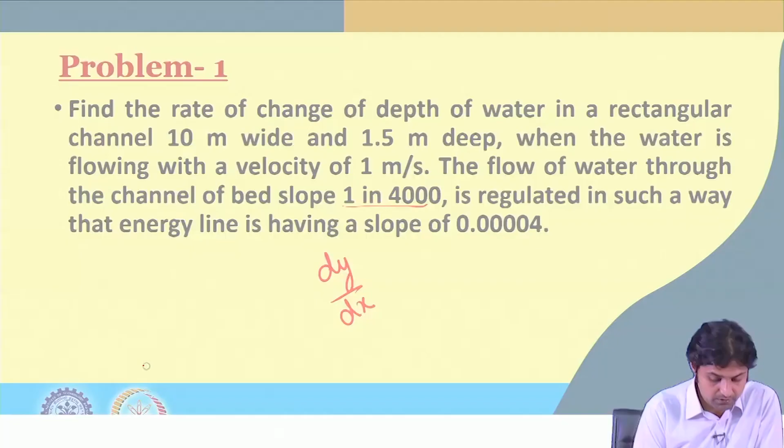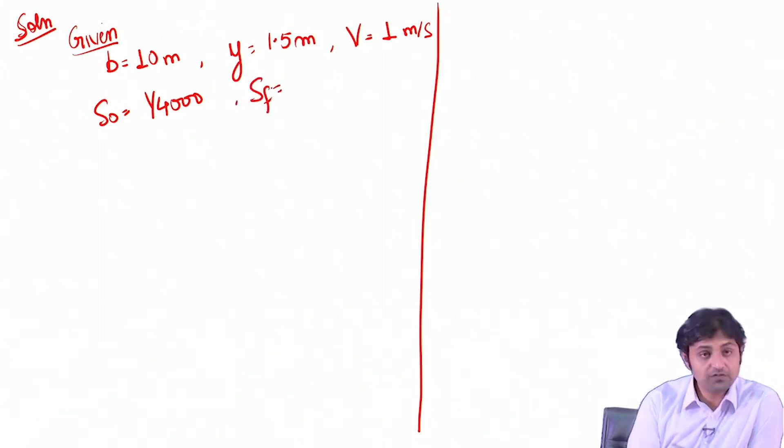We are going to see the solution. What things we have already been given: B is given as 10 meter, depth is given as 1.5 meter. We also have been given velocity of the flow, 1 meter per second. Bed slope also has been mentioned as 1 in 4000, so 1 by 4000 is the bed slope. We also have been given the slope SF, that is 0.00004.

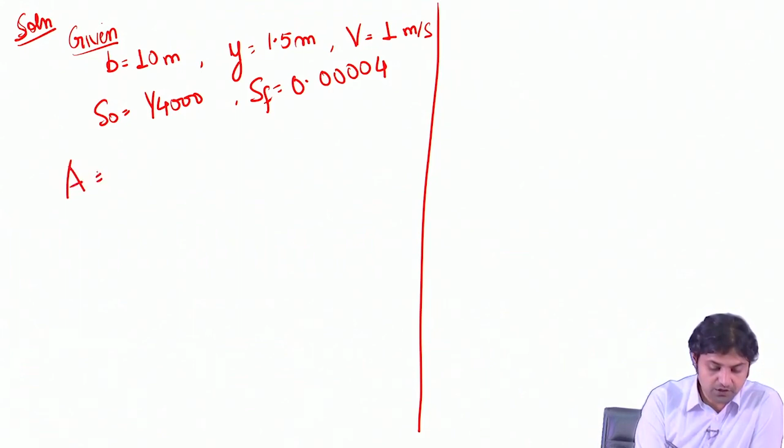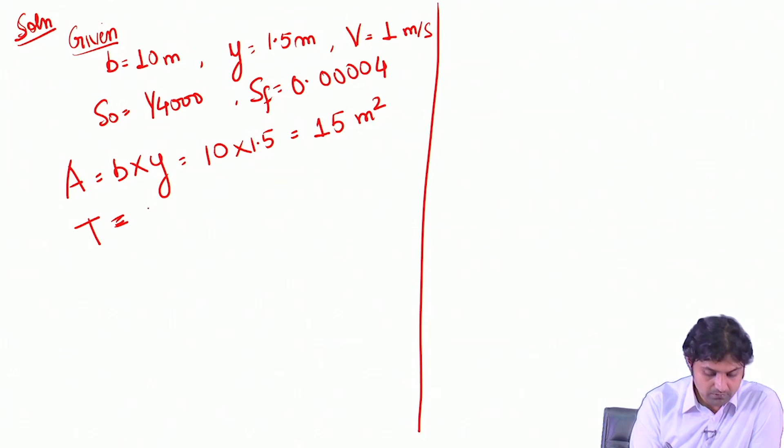This is quite a simple thing. First we need to calculate the area of the flow, which is nothing but B into Y, so 10 into 1.5, which is 15 meter square. We will go very systematically. T, the top width, is nothing but B, that is 10 meter.

Discharge is area into velocity. Area is 15 meter square into velocity 1 meter per second, so that is 15 meter cube per second. So we have been given Y, B, V, S naught and SF. We calculated A as 15 meter square, top width is already given as 10 meter, and Q we calculated as 15 meter cube per second.

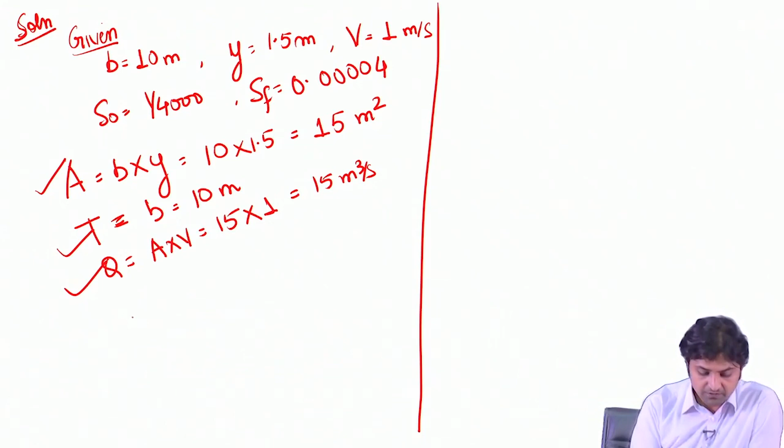What is the equation in gradually varied flow that we have derived? We derived that dy by dx equals S naught minus SF, divided by 1 minus Q square multiplied by T, divided by g into A cube. This is the equation that relates dy by dx, and we have been asked to calculate this.

So dy by dx equals S naught, which is 1 by 4000, minus SF which is 0.00004. Then 1 minus, Q is 15, so 15 square into T which is 10, divided by g which is 9.8, and then A cube, area is also 15, so 15 cube.

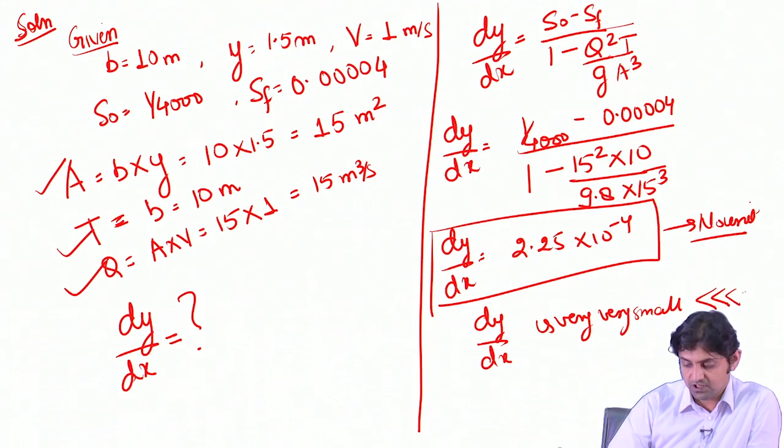If you calculate that, dy by dx will come out to be 2.25 into 10 to the power minus 4. Will this have any unit? No unit. So if you see, the slope dy by dx is very small, we can say much less than 1, true.

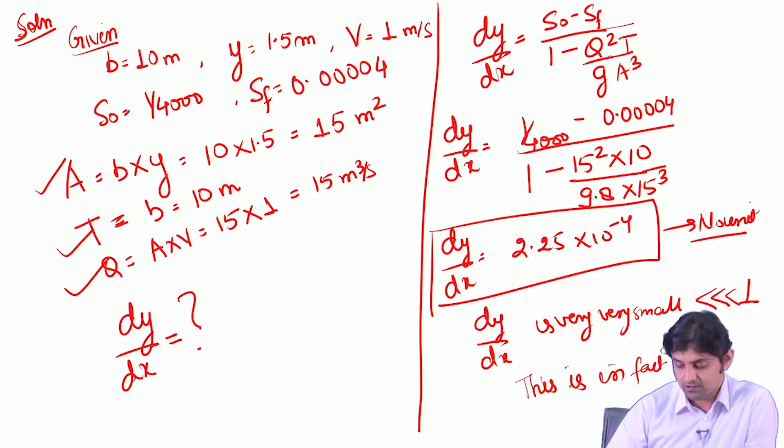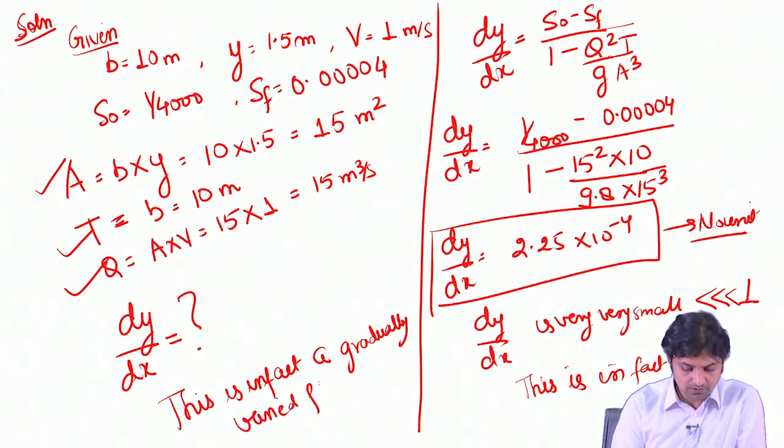So this is, in fact, I will write here, this is in fact a gradually varied flow.

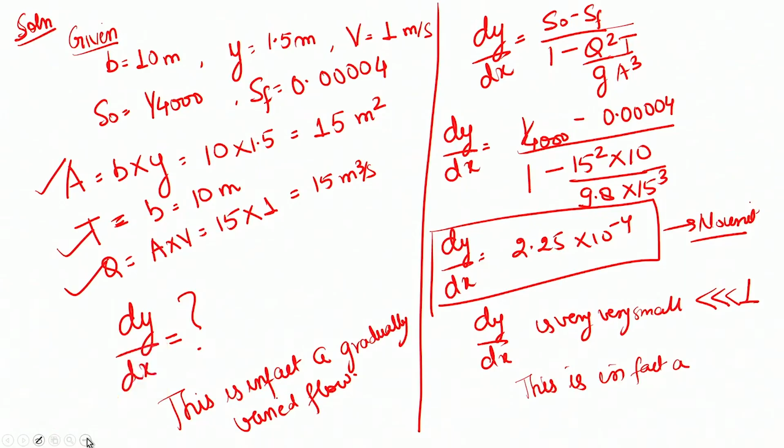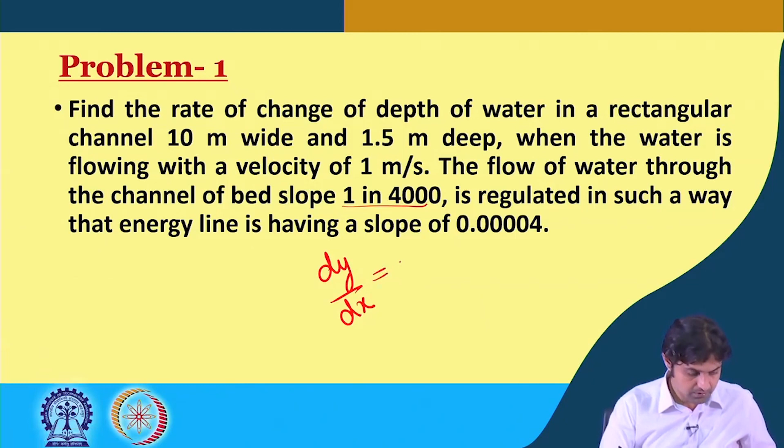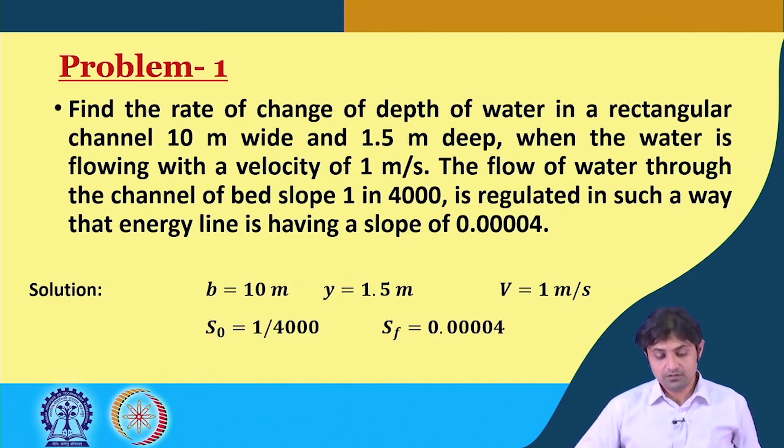So we go back, dy by dx came out to be 2.25 into 10 to the power minus 4. I will erase this, and I have included the solution here as well. These were the things that were given: area, same as we worked out on screen. The same formula, dy by dx equals S naught minus SF, and this is what we get. This was the final answer which we have seen on the white screen.

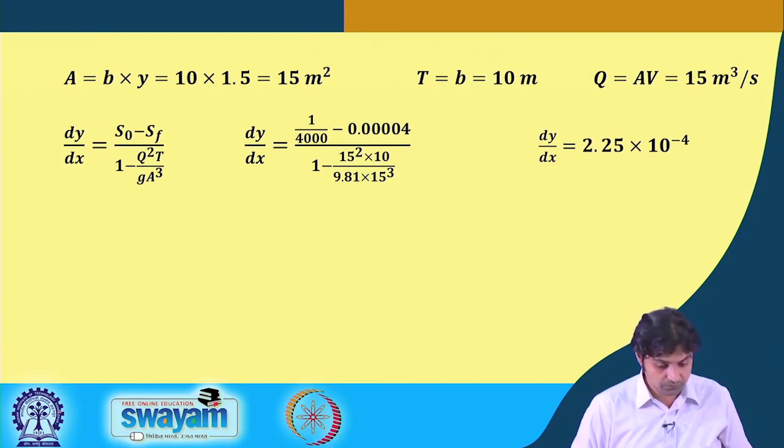Now we are going to look at another problem. The question is: a rectangular channel with a bottom width of 4 meter and a bottom slope of 0.0008 has a discharge of 1.5 meter cube per second. In a gradually varied flow in this channel, the depth at a certain location is found to be 0.30 meter. Assuming Manning's n is equal to 0.016, determine the type of gradually varied profile.

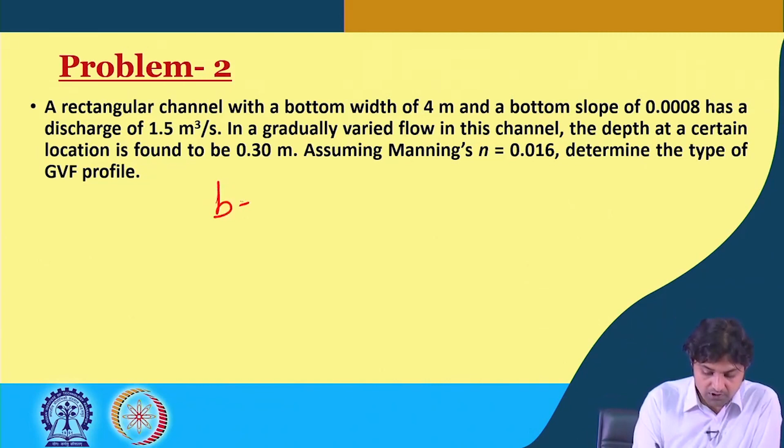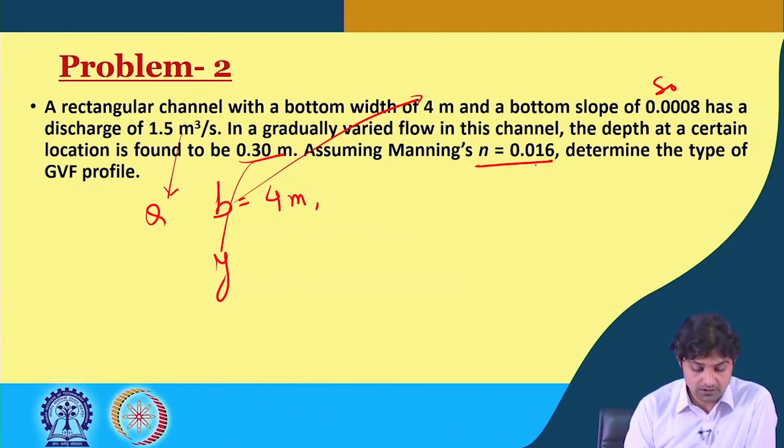We have been given the bottom width 4 meter, right here. Slope S naught is given, Q has also been given, and we have been given Y as well. Manning's n is given. So what type of gradually varied profile will it be? We are going to see that, and it will be very good practice for you to apply what you have learned about mild slope, steep slope, adverse slope, critical slope and the horizontal bed. So I will go to the white screen.

To start, SOLN means solution. So what are the things given to us? I'll draw. Given is B is equal to 4 meter.

Y we have been given as 0.30 meter. Okay, this Y is given. Q has been given as 1.5 meter cube per second. S naught is also given as 0.0008, and Manning's roughness is also given as 0.016.

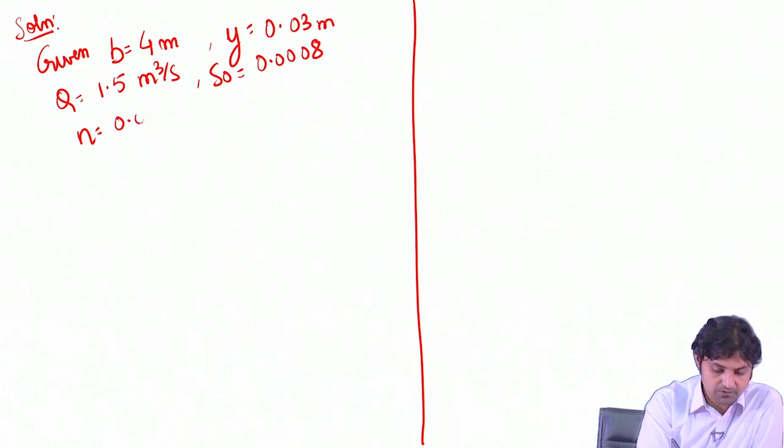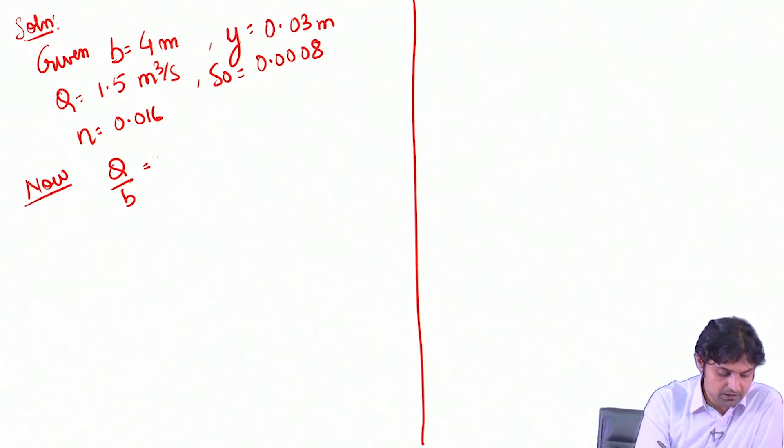All right, so now capital Q by B is 1.5 divided by 4, which is 0.375 meter cube per second per meter.

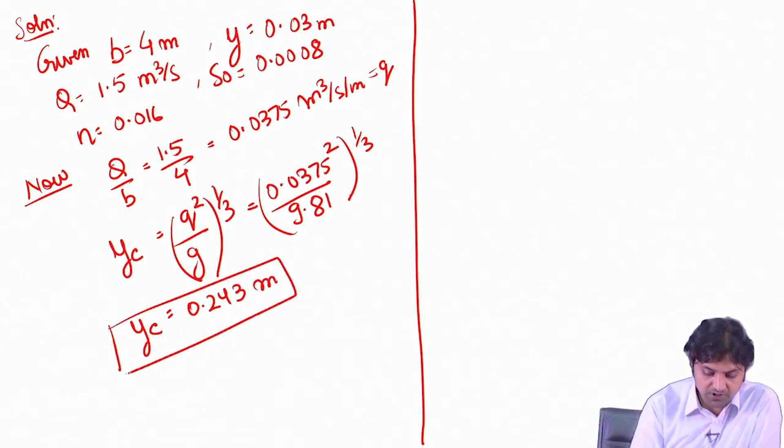So this is small q, all right. Now, you remember the way we calculated the critical depth, YC was q square by g, to the power 1 by 3, if you remember the formula from our lectures last week. So this is going to be 0.375 whole square by g, which is 9.81, whole to the power 1 by 3. If you do this calculation using your calculator or by hand, this comes out to 0.243 meter. So the critical depth which we have got is 0.243 meters.

All right, what is the other thing that we need to find? So we can use Manning's equation: Q equals 1 by n, A into R to the power 2 by 3, into S naught to the power half.

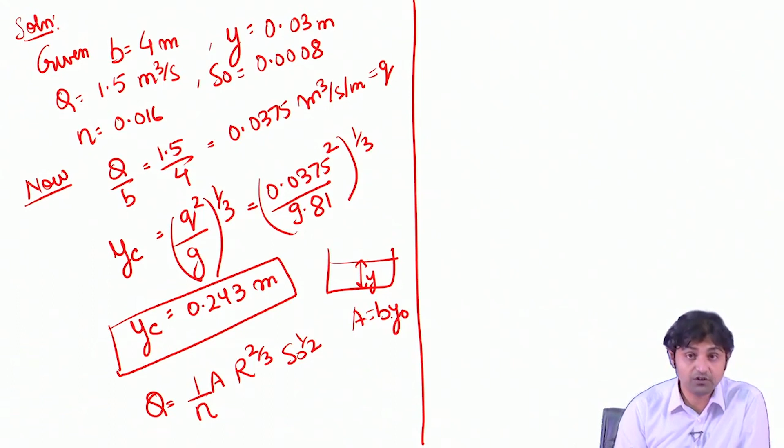So the area we already know, all right. Since this is a rectangular channel, if this is y and this is b, the area is b times y naught, because we also need to calculate the normal depth. So area is b y naught. Using this, hydraulic radius will be A by P. Here it is actually 4 y naught, so hydraulic radius will be 4 y naught divided by 4 plus 2 y naught.

Okay, so if we use all these values in this equation: Q is 1.5, given equal to 1 by 0.016 is n, A is 4 into y naught, hydraulic radius is 4 y naught divided by 4 plus 2 y naught, this whole to the power 2 by 3, and then multiplied by S naught to the power half, where S naught is given as 0.0008 to the power half.

All right, so this will actually give us: y naught to the power 2 by 3 divided by 4 plus 2, y naught to the power 2 by 3, is equal to 0.0842.

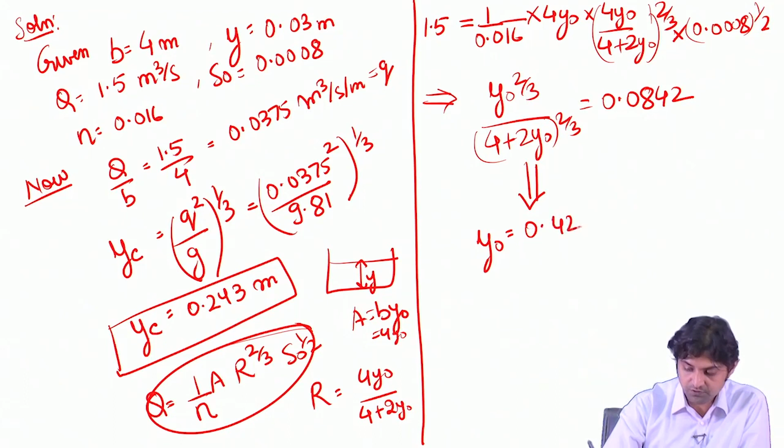So if we solve this, you can use any method, and we will obtain y naught as 0.426 meter. So the normal depth we have calculated using Manning's equation.

Is that true? Because that was the thing that we started with. So YC came out as 0.243 and the normal depth came out to be 0.426. Now, if you recall, we were talking about how if there is a horizontal bed, there is not going to be any normal depth, and here's why we were saying that. We were saying that because if S naught is equal to 0, then there is no existence of Q as such according to this equation. Also, when the slope was adverse, so S naught is less than 0, then S naught to the power half is an imaginary number.

So, concentrating: YC is 0.243 and Y naught is 0.426. First thing, since normal depth is greater than YC, this is going to be an M slope channel. Now, the water depth is actually—yes, so actually water depth is not 0.03 which I wrote, it was 0.3 meter here, all right.

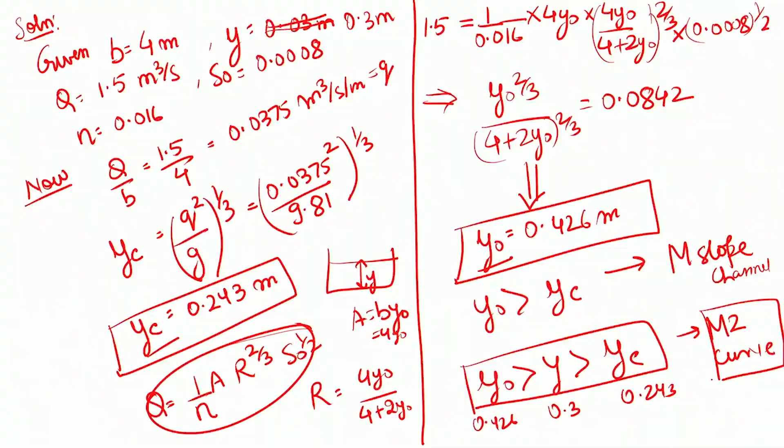So we see this: Y naught is greater than Y, and this is the critical depth. This was 0.426, this was 0.3, and this was YC was 0.243. So which type of curve? This is an M slope, plus since Y lies between Y naught and YC, it is going to be an M2 curve. So this is a good example, a very simple and good example indicating how you have to find the type of the GVF profile, all right. So this came out to be an M2 curve.

I will just erase this. So this is actually 0.3 meter, because the depth is 0.3 meter. So this is a typing error, okay. All right.

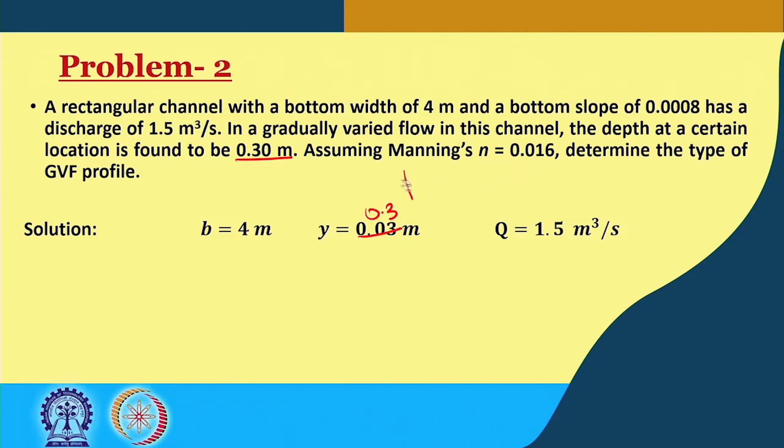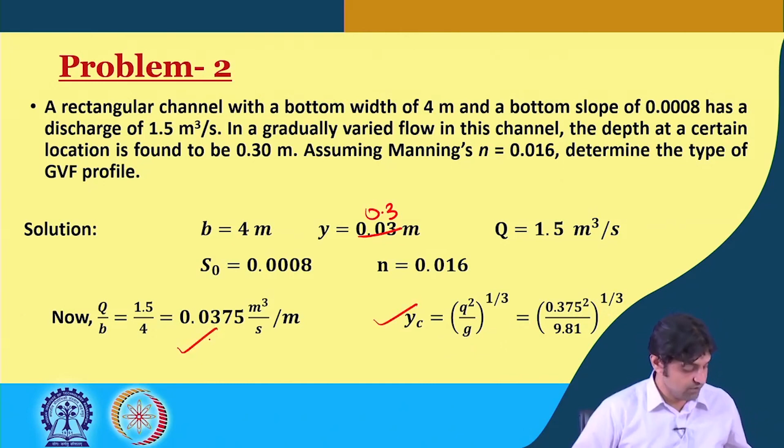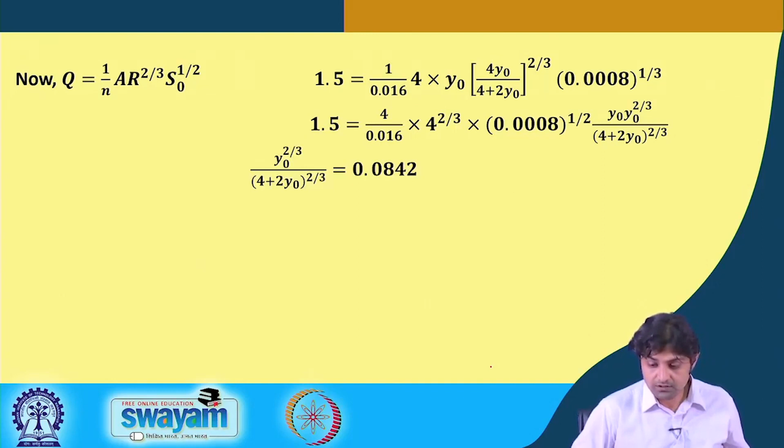All right, so similarly we have this again, a typed solution available. I think I will just correct this one when I provide you with the course material. So these are the things that were given. Similarly, we have calculated small q, and the critical depth is calculated like this; it came out to be 0.243 meter. So now, using the Manning's equation, we estimated the normal depth y naught, and this y naught came out to be 0.426, all right.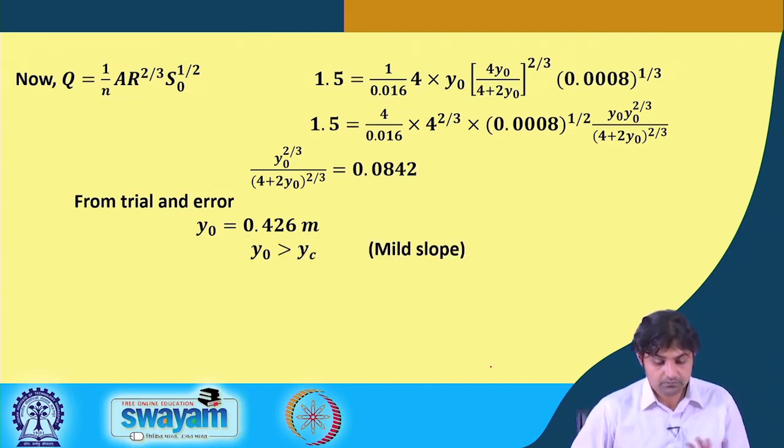Since Y naught is greater than Yc, it is a mild slope, and Y is less than Y naught, so it is called an M2 curve.

So we have another question. A wide rectangular channel has a Manning's coefficient of 0.018 for a discharge intensity of 1.5 meters cubed per second per meter. Identify the possible types of gradually varied flow profiles produced in the following break in the grade of the channel. S01 is 0.0004 and S02 is going to be 0.016.

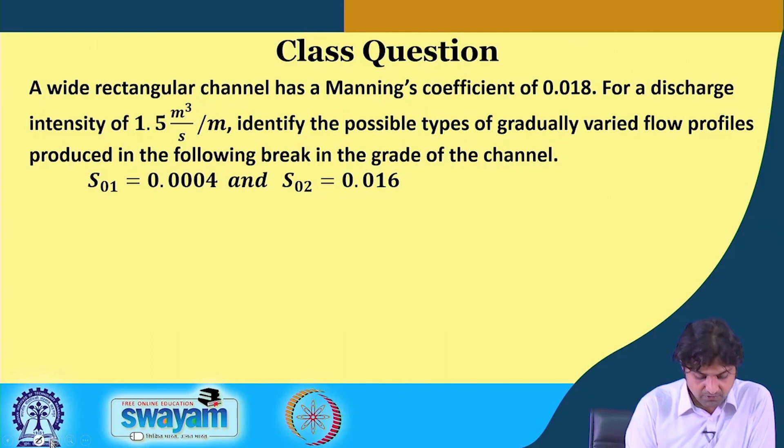Okay, this actually is a good question. Because in this topic we have less number of questions, I think it is better to solve it here on the white screen.

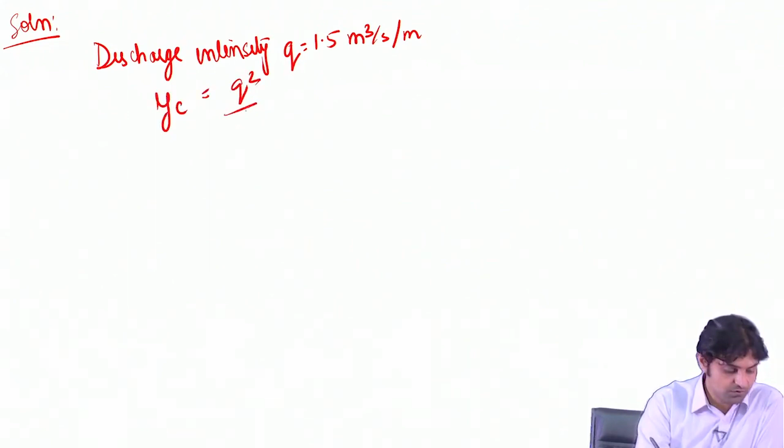So the solution shall go like this. Discharge intensity, small q, is equal to 1.5 meter cube per second per meter. So Yc will be found by small q squared by g to the power 1 by 3, a very simple formula that must be remembered, 9.8 to the power 1 by 3, and that is going to be 0.621 meter. So for normal depth, what do we use?

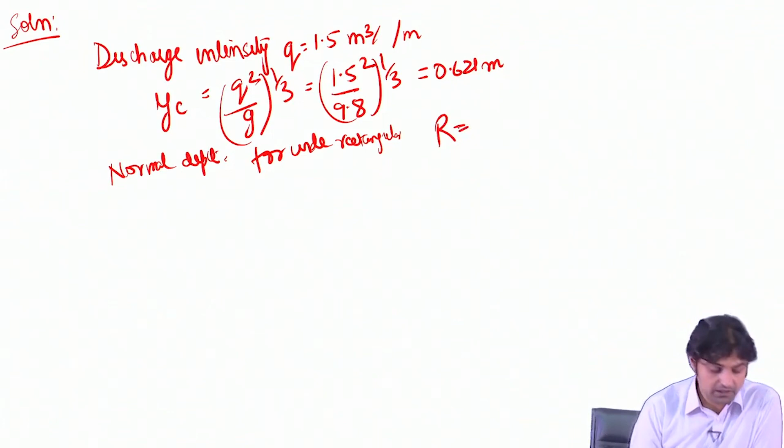Manning's equation. So for a wide rectangular channel, since it is so wide, the hydraulic radius becomes y naught itself for a wide rectangular channel.

You must have a question why. So hydraulic radius is A by P. B times y naught is A, P is B plus 2 y naught. If it is wide, B is very much greater than y. So B plus 2 y naught will be approximately equal to B. So this B and B get cancelled, that is why for normal depth in a wide rectangular channel, the hydraulic radius is the normal depth itself.

So now we use this formula, q is equal to 1 by n times y naught into y naught to the power 2 by 3 into s naught to the power half. You can also use the formula with capital Q, but I find it much better using small q. So we can write y naught as n into q divided by under root s naught, to the power 3 by 5.

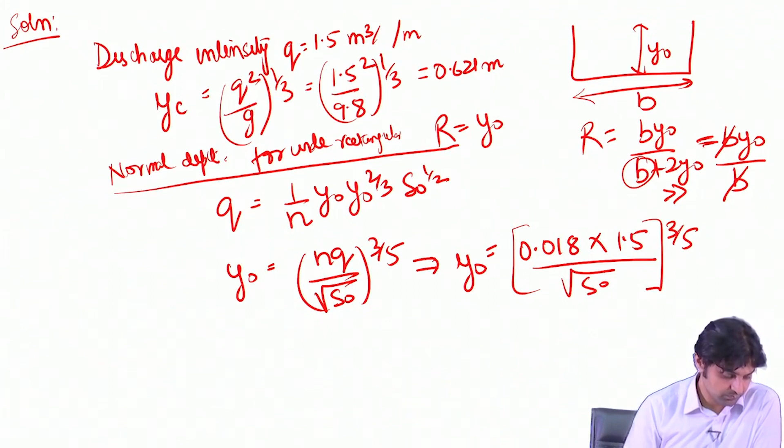So this implies y naught is going to be, substituting the values, n is 0.018, small q was given as 1.5, and under root s naught. So the question is, actually we can draw a table here.

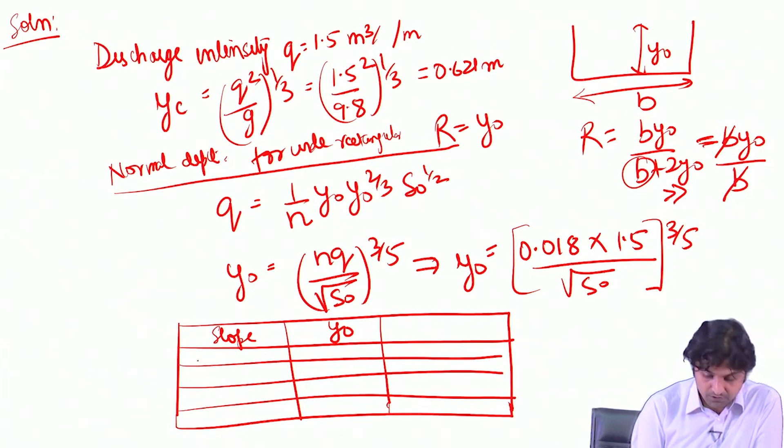That says slope and y naught. So 1, 2, 3 and 4. There are slopes 0.0004, 0.016, and then there is a critical slope, because this is the critical one. So for this S naught, if we put in the normal depth, we get 1.197, and if you put S naught as 0.016, we get 0.396, and Yc is 0.612.

There are two normal depths, y01 and y02, here. One gives us 1.197, the other is going to be 0.396. So this is what is written.

So if you go from 1 to 2, since y naught here in this one is greater than Yc, this is mild slope, first one. But in the second case, the y naught is less than Yc, so basically this is the steep slope. So the resulting curve is M2 on mild slope and S2 on steep slope, because the water depth is also here.

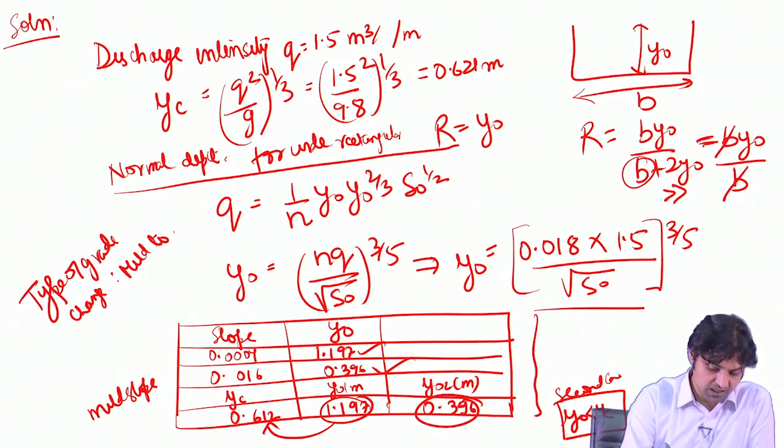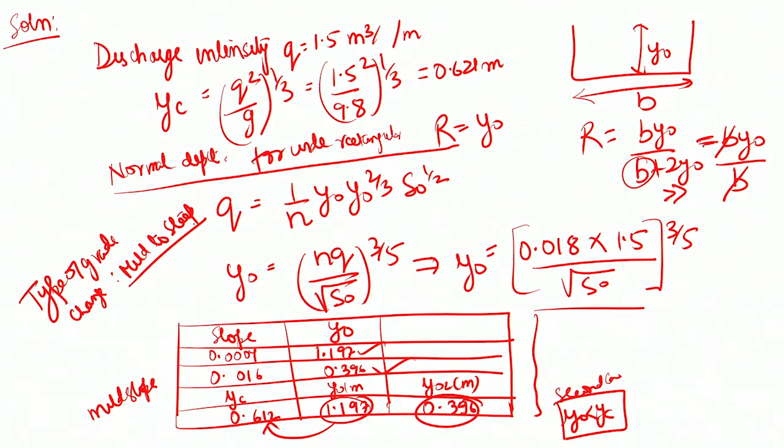So the type of grade change is mild to steep. So basically until this, this is fine, okay, good.

So we have included the solution again here for your convenience.

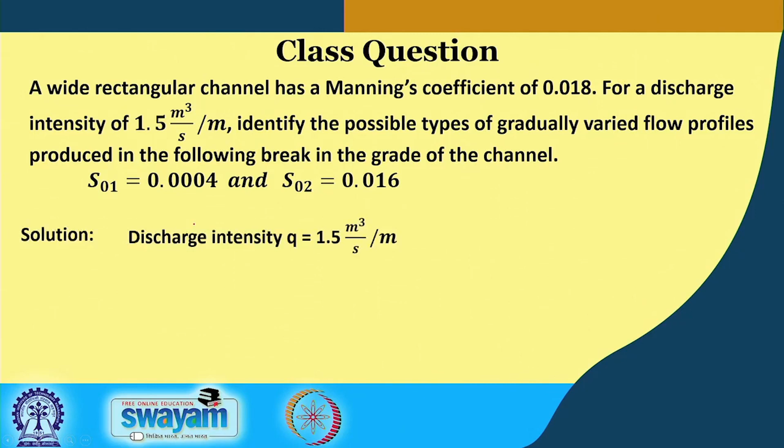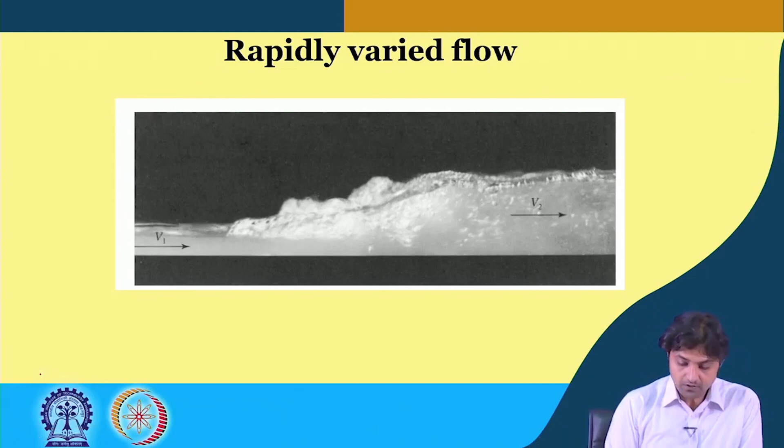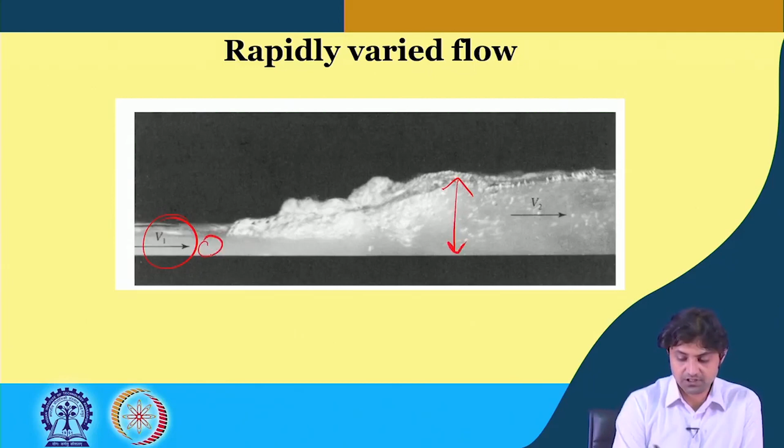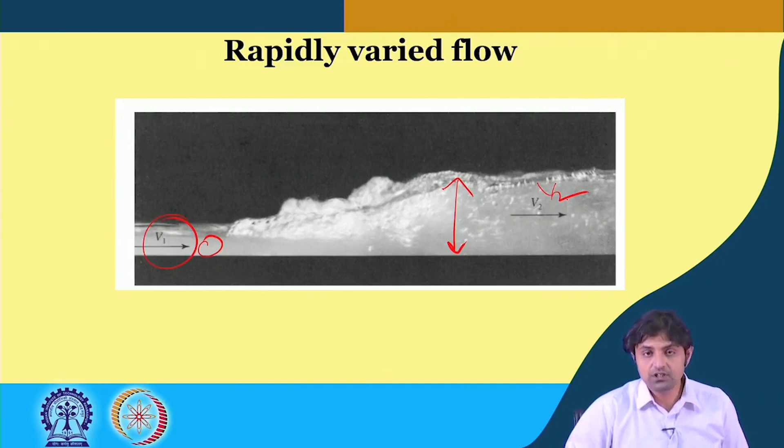See, if you see, there is something that is coming with a velocity v1 here, and somehow this height is larger, right. I mean, this seems that there is something which is different from this area. So the velocity becomes v2, maybe the height has increased or there is a bump or something. So in that case the flow varies very rapidly. Suddenly if there is some rapid change in the water level elevation, it is called rapidly varied flow. In this particular case, there is a hydraulic jump due to the change in bottom elevation.

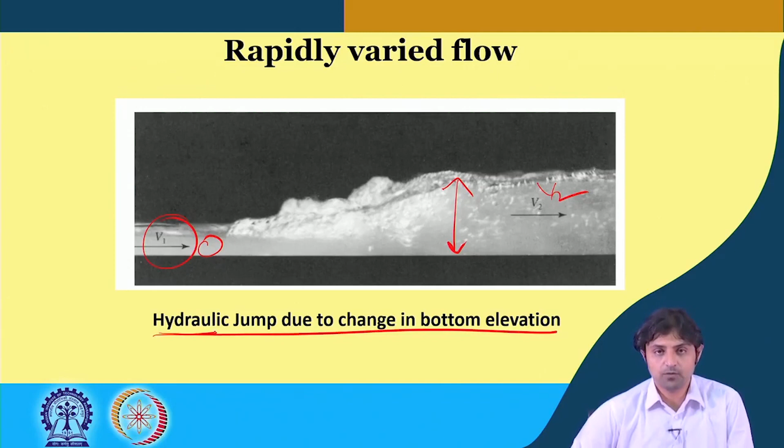We are able to say that because we know it from before. This is the photograph, probably from one of the experiments. So that was a fair introduction to rapidly varied flow. You now understand what hydraulic jump is, one type of rapidly varied flow.

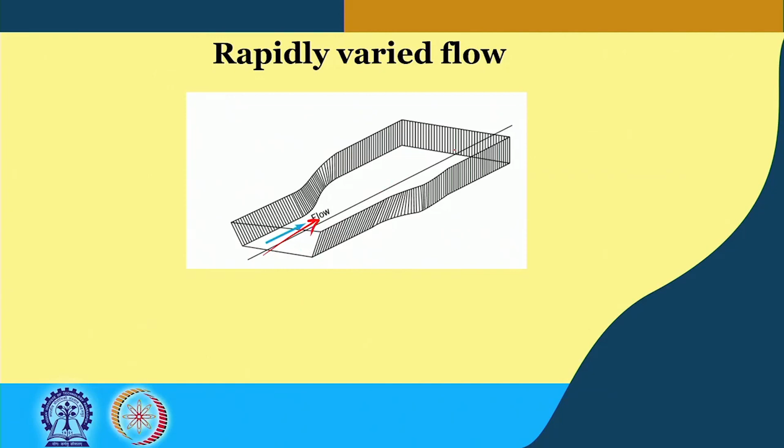So if you see a flow like this, if there is a flow coming in this direction and the area suddenly increases, that is the rapidly varied flow that happens due to the transition. So the first was due to the height, the second one is due to this transition, changing the area, transitioning from smaller area to larger area, for example.

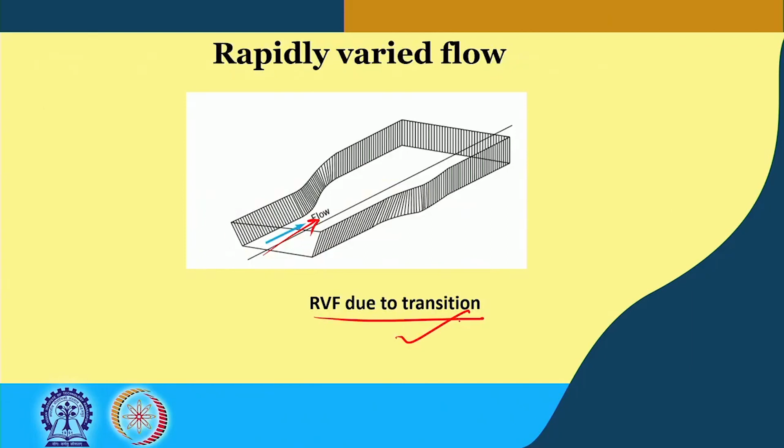So now, the most famous type of rapidly varied flow is called hydraulic jump. This is the concept that becomes the core of our next two lectures, and we will start the next lecture with this particular concept, hydraulic jump, go through a small derivation and solve some problems which will give you a better understanding of hydraulic jump.